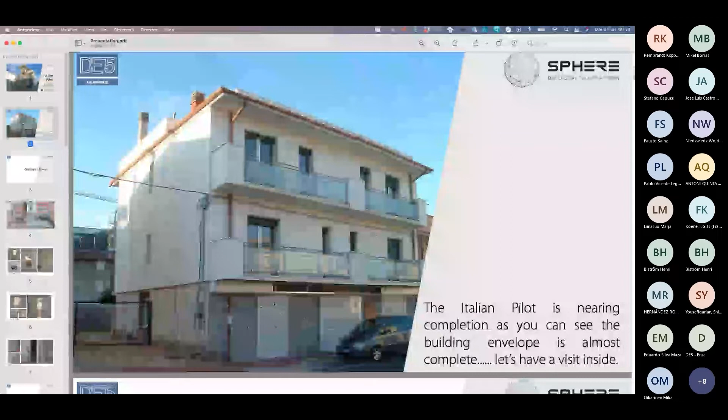For this reason, we are now going forward in order to finish it. The windows should arrive today, I assume. The company sent us info that they're arriving today. I hope that it will be true. Okay, ground floor.

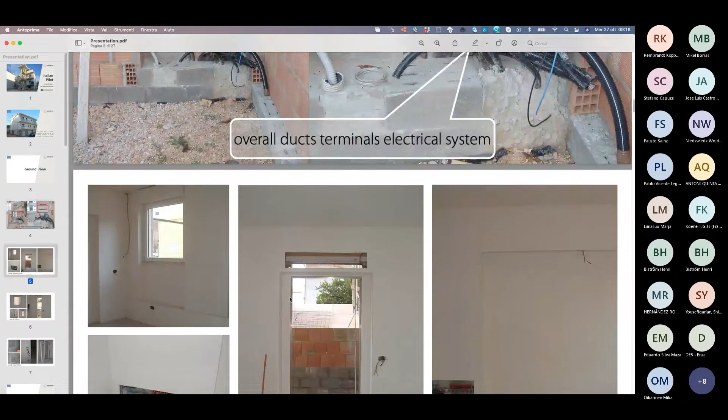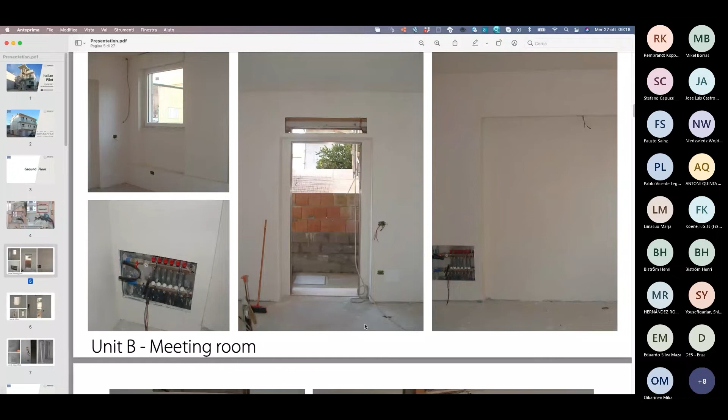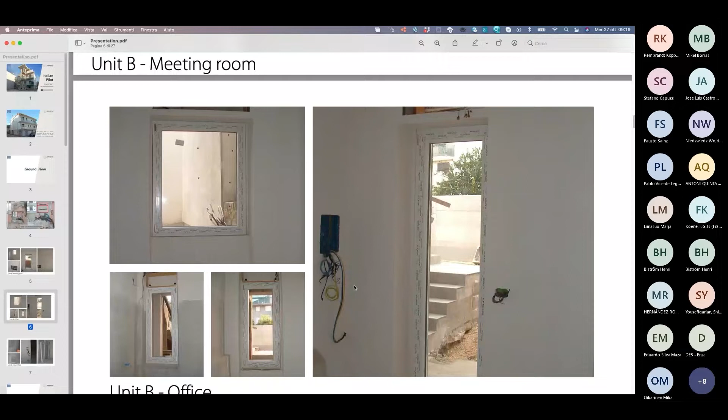Also in the ground floor, as you can see, the frames are missing. Here we also see that just the finishing of the floor and the finishing of the electric systems is missing. Okay, here we can see some windows already. The Unit B office at the ground floor, Unit A and Unit B. Okay, that's it. This is what I was telling you.

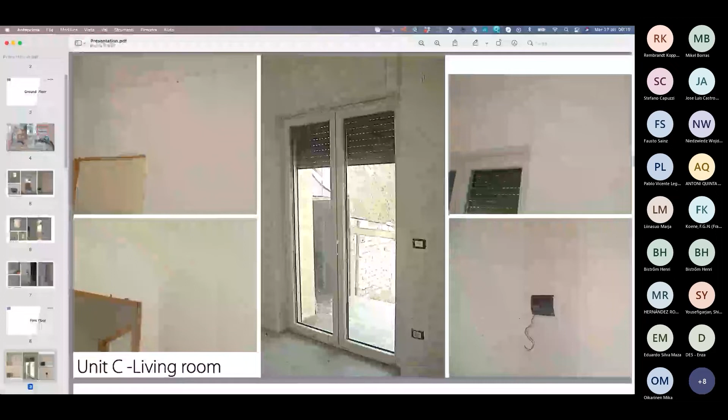Then the first floor is almost finished. The first floor is finished also with the flooring and also with the electrical system. Second floor, but the second floor we don't consider as a whole in the Sphere project, as we were cutting some expenses. BIM model.

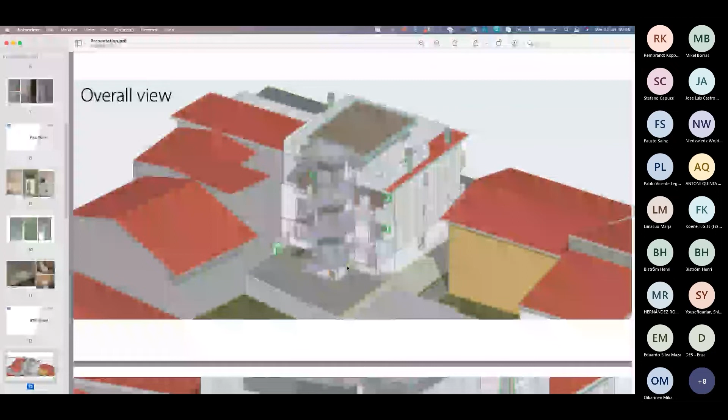This is an overall view. You can see the direct expansion unit, the external direct expansion unit for each unit of the apartment, and this is a unique exterior direct expansion unit for the whole ground floor, so unit A and B. This is a little zoom. Here we also see the electric meter and the Raspberry Pi or the box. And this is just a view of the ground floor with the internal direct expansion unit.

Okay. Sorry, guys, can you hear me? Yeah, please. Yes, yes. Loud and clear. It sometimes breaks up a little bit, but it's okay. Okay, because Luca was shouting to me that the line was not okay. Okay. But I think they are quite easy concepts, so it's not really important. So it's good to show. I think that you can understand everything.

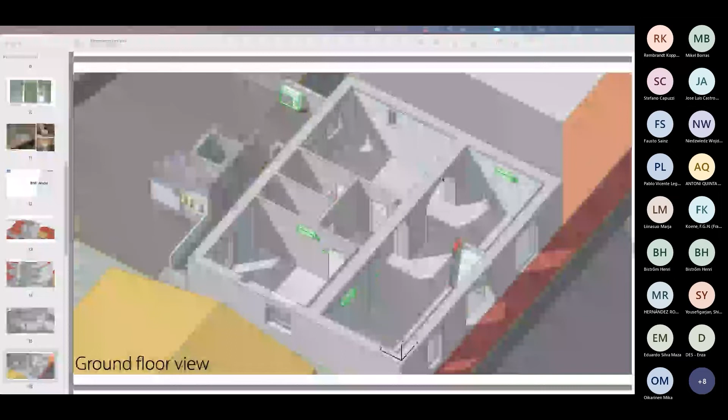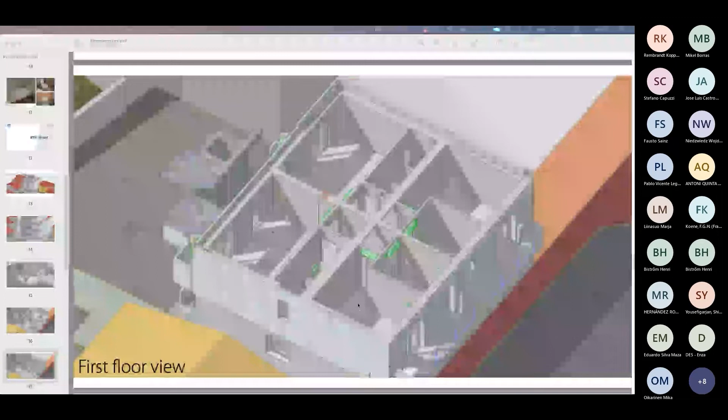It's not a problem. So this is the ground floor with the internal unit, the sensor, and going forward, we will see everything explained. This is the first floor, the little apartment, where there is the living room, bathroom, little bedroom, and the big bedroom, so 2 beds, 1 bed. Here at the first floor, instead of the radiator, we have the radiant floor, I don't know how they are called in English.

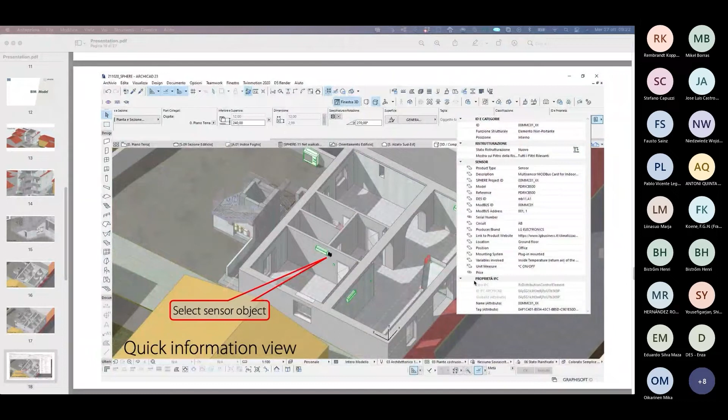Okay, and this is a screenshot from ArchiCAD. And this is the sensor object, okay? And here inside, we put all the information regarding it: LG Electronics, Modbus, which kind of ID, Sphere Project ID, the description also. So inside here, there is all the information we could need. So this is all the information again, more in detail, how the BIM object will look, and the object settings panel.

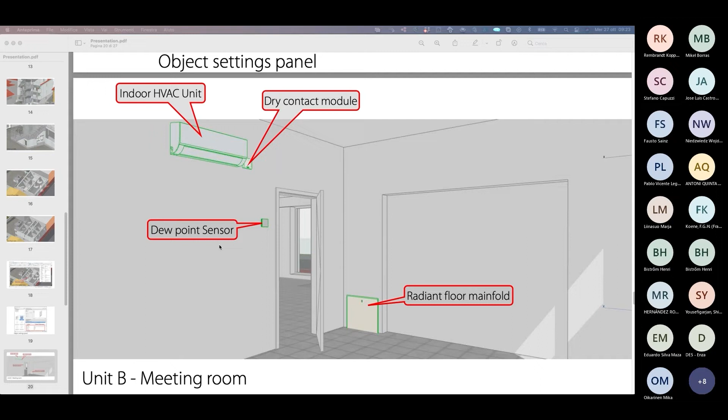And here is a screenshot of the meeting room, for example, in unit B. We can see the indoor HVAC unit, dry contact module, dew point sensor, and the radiant floor manifold. So these are some of the components of the Sphere project. So in summary, these three devices are being installed. We have them at the office. We need just to install them and try them.

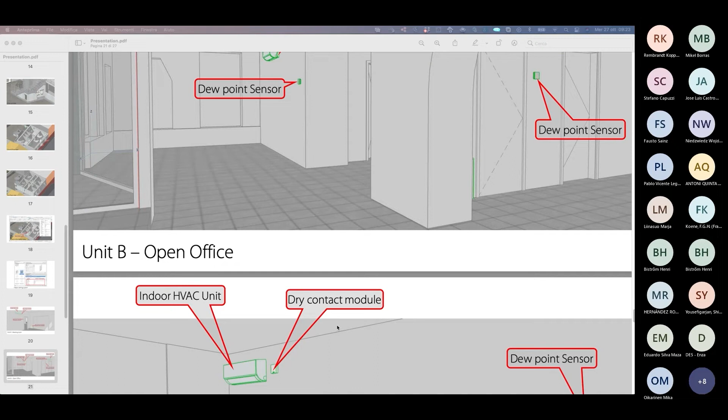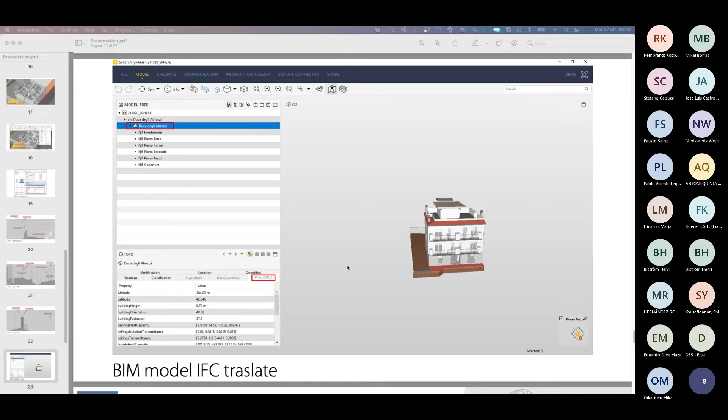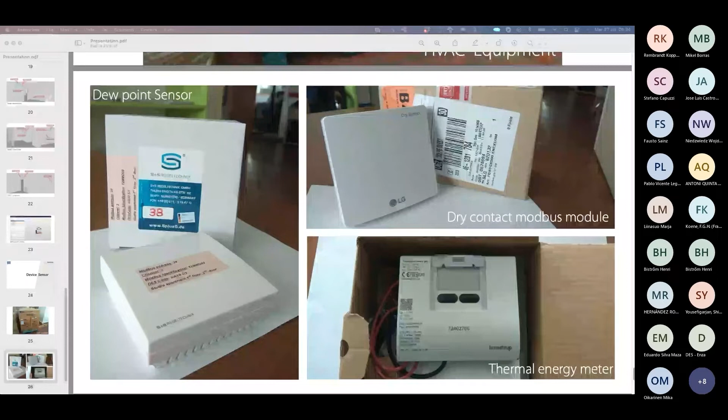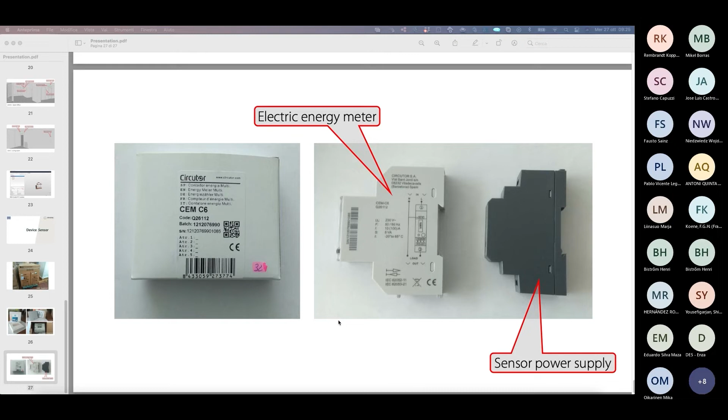And finally, we show you the devices and sensors that arrived at our headquarters. So they're here: dew point sensor, dry contact Modbus module, and thermal energy meter. We have also the electric energy meter and the sensor power supply. We need just the Raspberry Pi, but as agreed with COMSA, we will wire everything. We will install also the internet connection, so they can check if there are some bugs in all the programming they have done. That's it, guys.

As you have so kindly said previously, I'm Guillermo Reyes from COMSA, and I will be presenting how we plan on capturing the data in the Italian pilot using a Raspberry Pi based data logger. So in this presentation, I will go over the general scheme and then some hardware and software tools that we're using, then explain in brief detail the software architecture for the data capture, and finally a demonstration on what we currently have in terms of hardware.

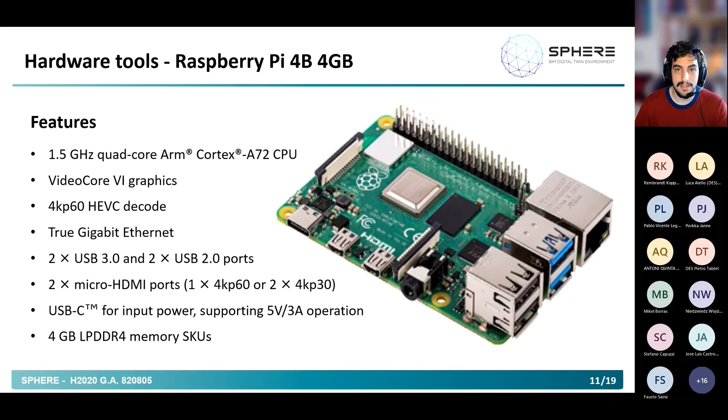So first of all, let's go over what the hardware that we're using consists of. We have a Raspberry Pi, which is a processor unit capable of running a whole operating system on its own. Currently, it's running Raspbian, which is a distribution of Debian, one of the most famous Linux distributions that currently exist. And it's actually quite potent for its size. You will see it integrated in the whole data logger later on. And most important of all, it can be expanded, and it has Ethernet capabilities, which eases the connection quite a bit.

In order to be able to actually pull Modbus data, we have this expansion card or HAT that goes just over the Raspberry Pi. This HAT has basically two RS485 channels that allow us to interface with all the sensors over Modbus RTU protocol. And it's conveniently prepared to be a plug-and-play solution over the Raspberry Pi that has pretty much worked from the start.

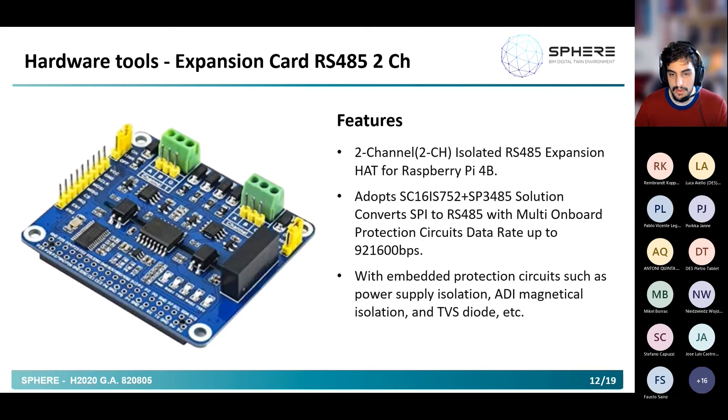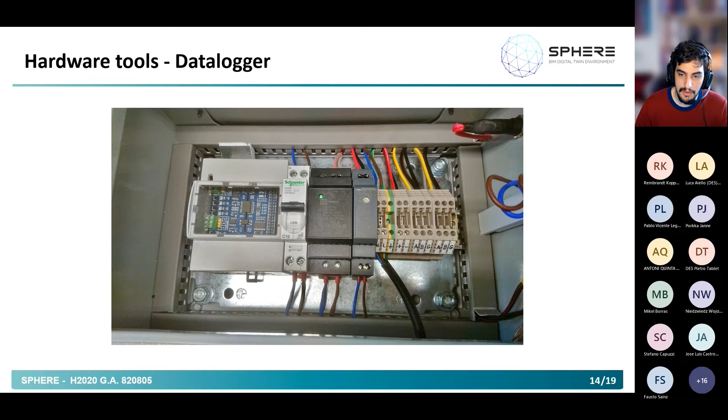And it has been designed from the ground up and put together mainly thanks to Antoni. He's one of the main sponsors of this data logger.

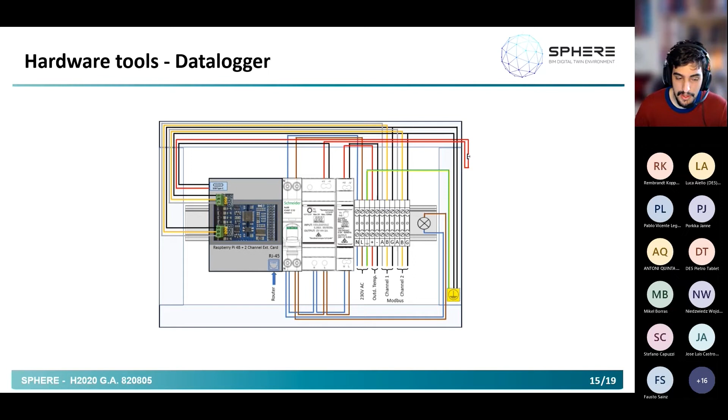So in terms of the software that we're using in order to accomplish all of this, first of all, we have Node-RED. Node-RED is a graphical programming platform that can be installed in practically any device, and that can be accessed over the browser. So it is actually very convenient in that regard. And it's mainly a platform that aims to allow you to integrate basically any hardware that you have installed with online services.

What we're doing here is one of the architectures that is pretty much the reason why Node-RED exists. It also has Azure integration as a baseline, so that is a very interesting feature for the kind of data transfer that we are trying to accomplish here.

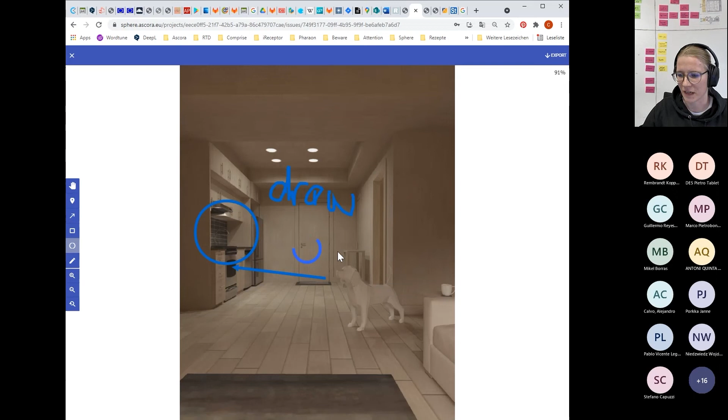And then you can save those changes, and the person who maybe is responsible for fixing this defect directly has a picture of the defect, with a circle or an arrow or some notes written on it, so that there are easy notes on it, and you know exactly what you should focus on. Yes.

So maybe we want to create a new ticket. Oh, I have to save it. For example, we want to say, okay, there is a leaking pipe in the bathroom. So then maybe we should at first have a look: is there already a responsible person for this craft who's responsible for bathroom defects? I guess it's gas, water and drainage installation. And then we can see there's no craft or responsible person added to the system at the moment.

So I think alarm system is not the right thing. Roofing work as well, concrete work is also not the right craft for it. So if this is the case, we can go to settings, discard, and we should add a new responsible person for this craft. So we choose craft responsible, we add the craft gas, water, and drainage installation. Then we need an external responsible person, so maybe we choose Nicola. Internal responsible person is, for example, Pietro, and we save this.

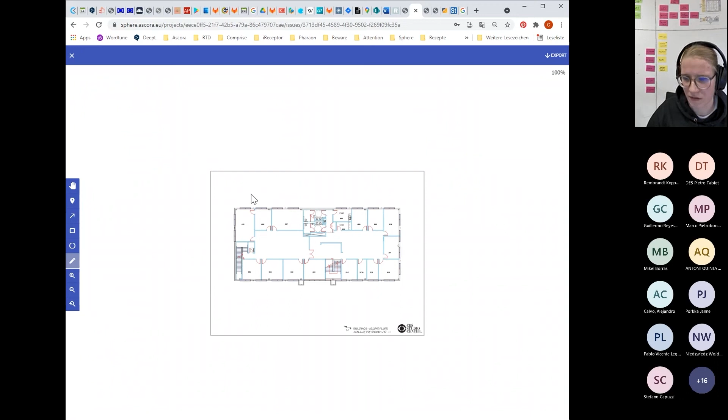And when I then click on this project, I have access to the ticket I've shown you in the other account with the general defect, the responsible person is me, and I can add a new comment, for example. I can save it. I can also do some drawing here on this. Maybe I do this and that and save it. And I save all my changes, so a new comment and some nice drawing on this floor plan.

And when I then log out again and go back to the admin account, then hopefully we can see all the changes I've made. So go back to the general defect. This is my ticket here. And we can see, okay, here's the new comment that I've made. And we can see here, not the drawing again.

So in the overview, maybe also again a problem of loading. You can see it here in the thumbnail, the drawing is there. To be honest, I have no clue why it's not here when I open it. I will write it down and tell our developers to have a look at it. But normally it should be there.

Yes. So this is the current status of Flink2Go, but that's not all. One thing that was raised was, as I told you, that it would be nice if we can draw some things on the pictures. And the other requirement was that it would be great to have a better insight into the building and where the defect is located within the building. So that's why we said it would be really nice to have a 3D visualization of this building within Flink2Go.

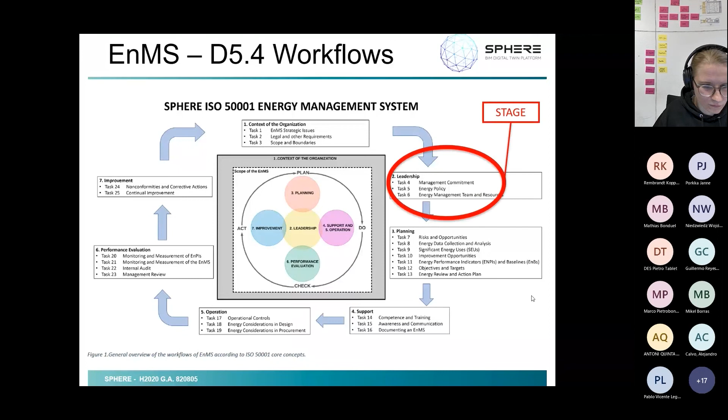So this is an image that summarizes the workflows that have been developed following the core sections and principles of the ISO, and following, of course, the cycle of Plan, Do, Check, Act that I think most of you are familiar with. The workflows are divided in stages. Each stage is made of tasks, and the workflows have been developed in the deliverable also in a way that could on a further occasion be implemented in the digital tool, so already in a perspective of the documented information, status and approvals.

These are examples of workflows, for example, related to leadership aspects and energy policies. We also tried to define some logic patterns, describing the tasks that compose a workflow. We have two kinds of tasks. The first kind is descriptive and compilative, requiring narratives or defining procedures, policies or non-conformities. And then we have data-related tasks, for example tables, dashboards, energy data, EnPIs or energy performance indicators.

And so you can see some examples of what has been developed. The tasks are made of a very brief narrative and some tables, samples, checklists, and this has already been developed with the idea to implement it in a digital platform. The Finnish pilot Caverion included genuine input in the deliverable, providing a first test of the tables, compiling them with the energy data, since it was the only existing building at the time, and also with improvement opportunities information. And then in June, we asked all the other pilots to test the paper version of the tool.

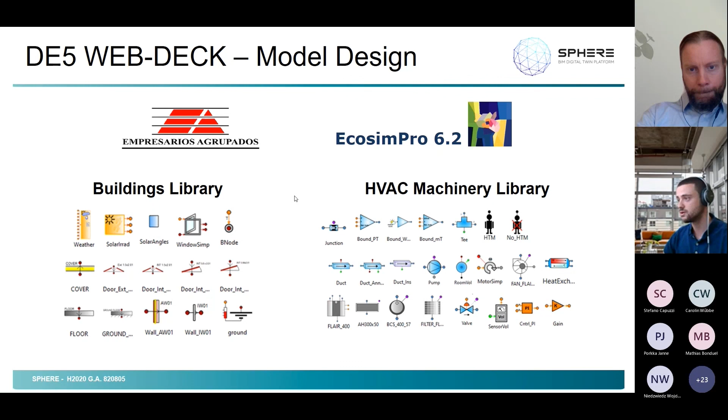So to build a building model using EcoSim Pro, first of all, we take our software, and using the HVAC toolkit, we are able to model both the passive building using the buildings library and all the HVAC systems in the building using the HVAC machinery library. So how do we do that? First of all, we need to collect all the relevant data about the building, such as the exact location, weather parameters, the HVAC configuration, IFC files, technical data, PDF files.

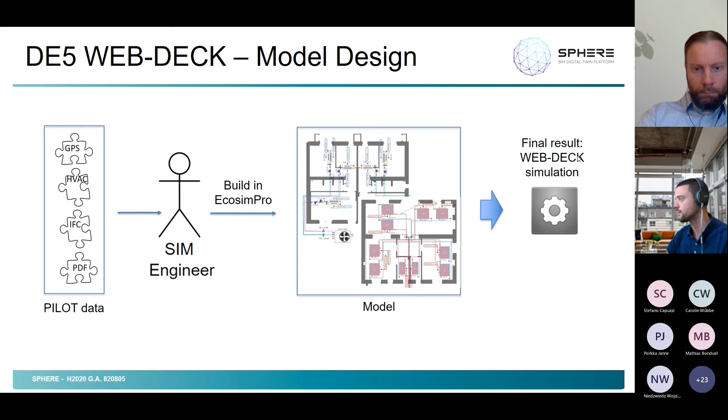And with that information, the simulation engineer is able to build the model using EcoSim Pro. And once we have the model, we can generate as a final result the WebDeck simulation. So what is exactly a WebDeck? A WebDeck is a black box, and inside the black box, we have the mathematical model of our building. So this box takes some inputs and we generate as a result the simulation outputs.

In the case of the DE5 building, we are using as input variables the inner and outer temperatures, the set points of the machinery, and the working modes of the machinery as well. And we can introduce those input variables either manually, or those variables can be taken from an IoT database. So once the webdeck has these inputs, it will generate a simulation output that in this case can be temperatures, relative humidity, or electric and thermal energy consumption.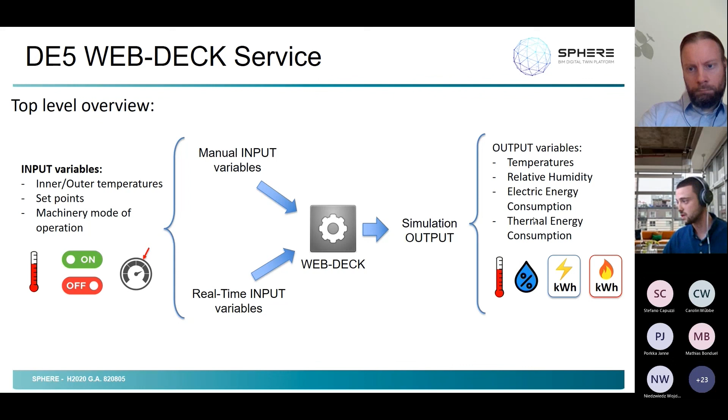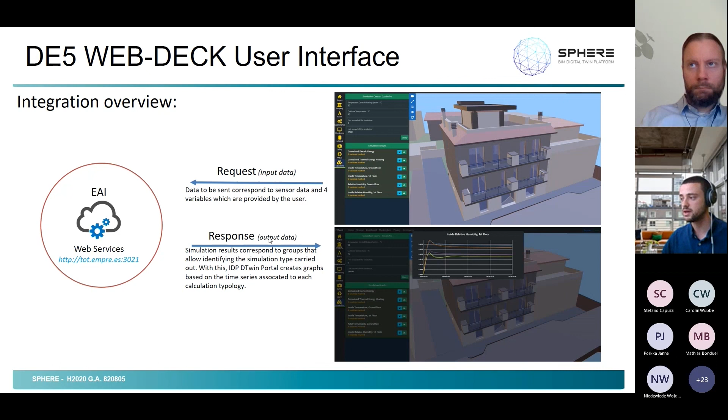This is from a top level point of view. And if we look at the low level, we have something very similar. We are taking some inputs, either manually or from an IoT database, and those inputs are going to be introduced into a JSON file. Then the webdeck will receive that JSON input file, and we generate as well a JSON output file. We have published this webdeck service into this URL that is the one that IDP is using to integrate the web service into their platform. So the platform is making a request to our web service with the input data, and the web service is returning a response with all the output data we saw before.

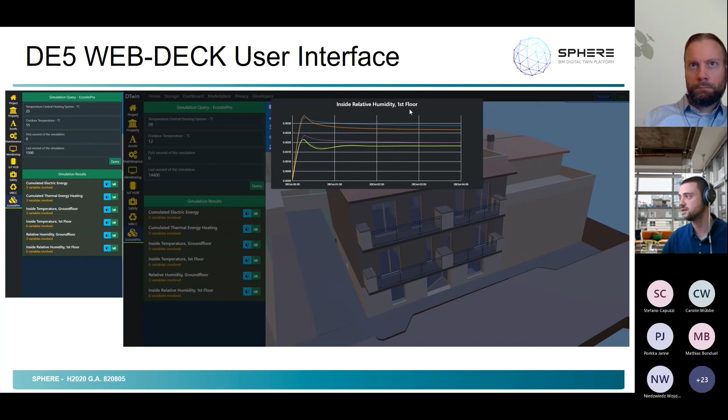So this is a screenshot of the IDP platform with the web service integrated, and here you can see some of the simulation results. In this case, we have, for example, the electric energy, thermal energy, temperature, relative humidity, and here you can see as well a graph. This is for the 26th of October, with the evolution of the relative humidity in the different rooms of the first floor.

And to finish this presentation, I would like to talk about the usability and main functionalities of the web service. First of all, I would like to talk about the predictions. With the web service, we can make forecasts about how our building will behave in the future. So for example, let's say I want to analyze the CO2 concentration of a room and how it will rise if the occupation is higher than expected. That way the administrator of the building, for example, can decide what machines to use. It can define the set points and so on, always to optimize or maintain the thermal comfort and air quality of the overall building.

Then another important functionality is making comparisons between ideal or theoretical results versus the real or measured ones. That way we can analyze deviations and see the possible causes of them, and also linked to this, the possibility of using the simulation or the model as a redundant option in case one of the sensors in our building fails. So we can fill that gap of information with our simulation results. And that's all for the presentation.